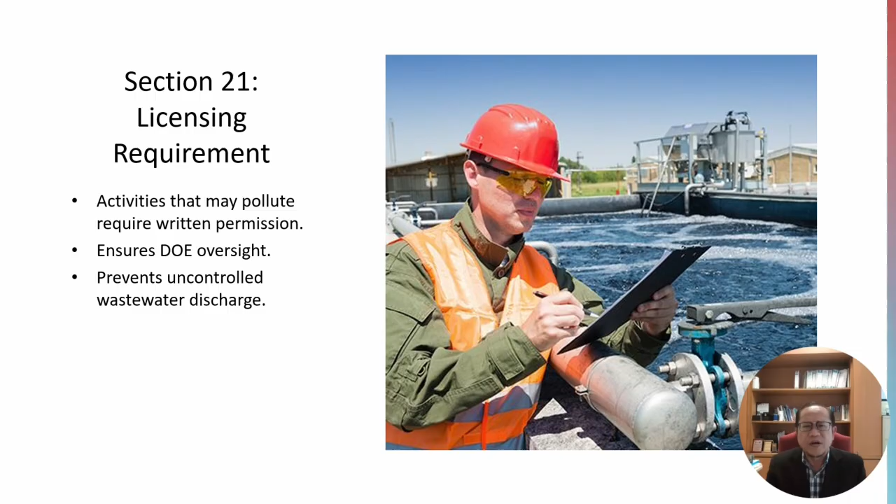Section 21 requires certain activities, especially those that may pollute, to obtain written permission or a license from the Director General. These include facilities that handle wastewater. Essentially, it prevents anyone from operating without proper oversight. And this section matters because licensing creates accountability. It allows DOE to set conditions and limits before any activity begins. It also ensures operators understand their responsibilities early on instead of waiting until a problem happens.

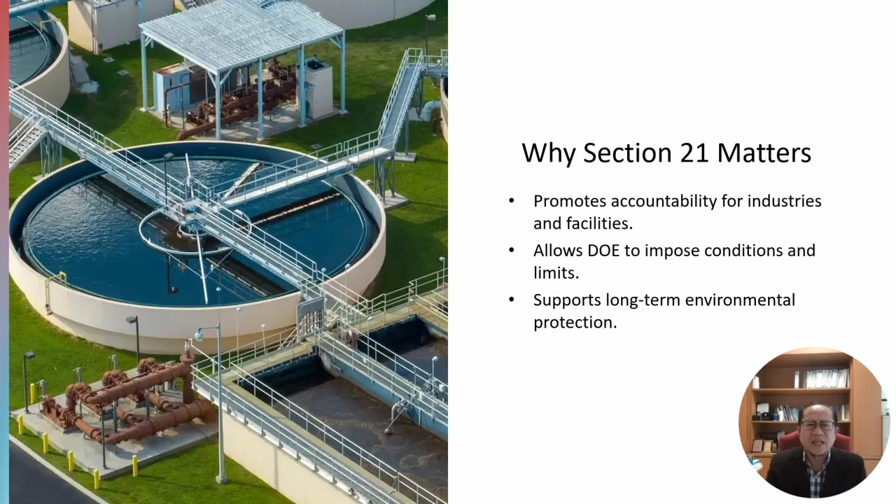Facilities that fall under this section must follow specific conditions. This may include abiding by discharge limits, performing routine monitoring, submitting sampling reports, and keeping their treatment system in good working order. These conditions help ensure pollution doesn't occur unintentionally.

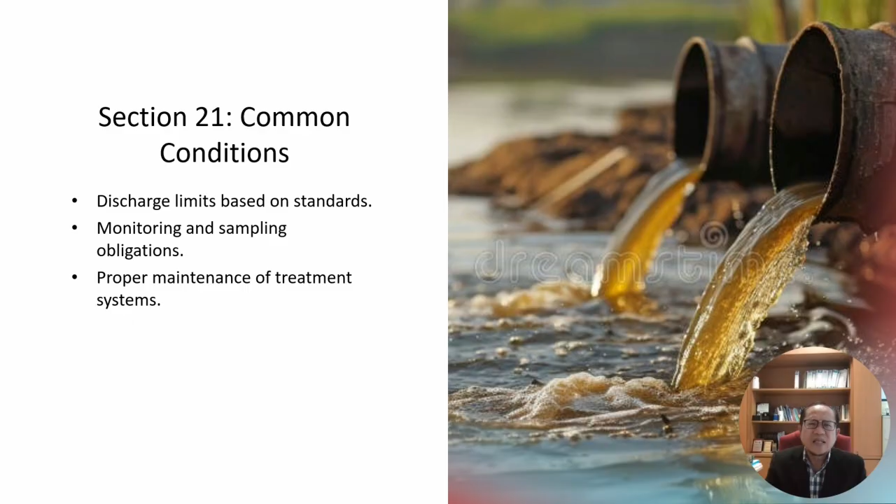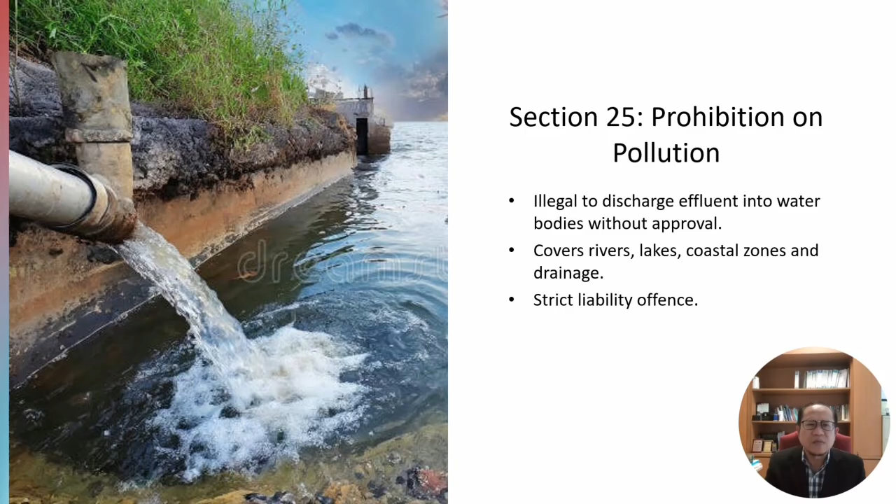Section 25 is strict. It makes it an offense to discharge any waste into inland waters without written approval. This applies to rivers, drains, lakes, and even coastal waters. Whether the discharge is intentional or due to negligence, it may still be considered an offense. The implication is simple. Facilities must treat wastewater properly before releasing. If they don't have approval or if the discharge does not meet the required standard, they are liable for enforcement actions. This protects the environment and public health.

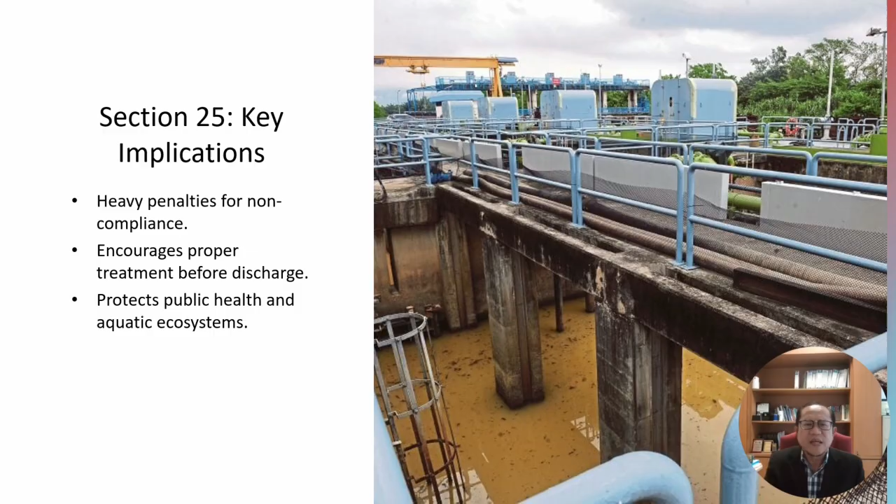Examples include releasing untreated sewage, bypassing treatment during equipment failure, or allowing overflow because a facility wasn't maintained. Even accidental releases may fall under this section. So, operators need to be proactive.

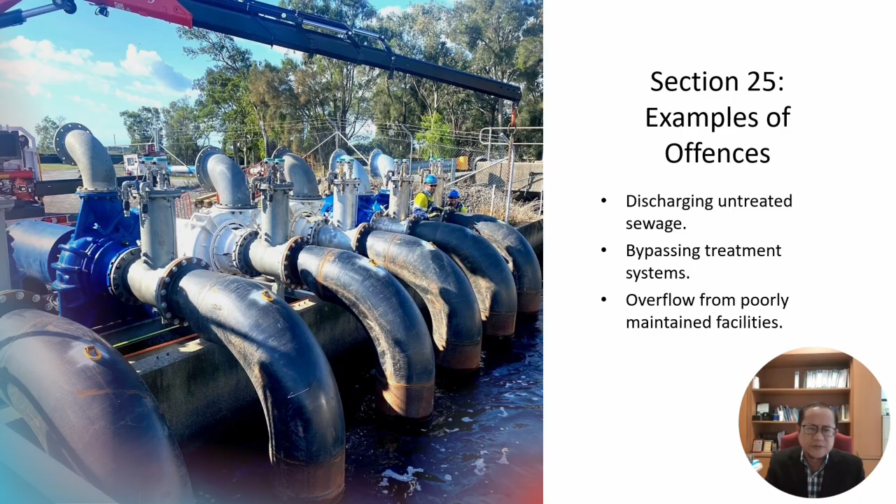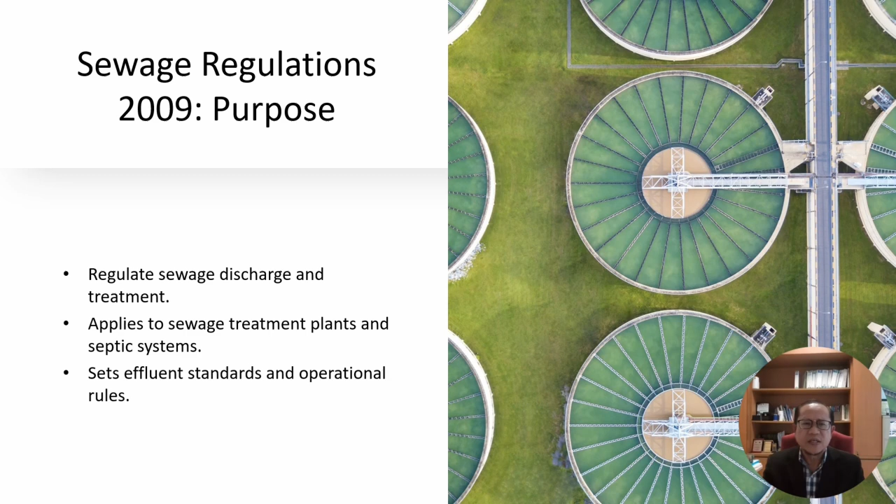These regulations provide detailed requirements for how sewage treatment systems should operate. They apply to everything from centralized treatment plants to small individual systems. Their main purpose is to ensure sewage is treated safely and consistently. The regulations outline how treatment systems should be operated and maintained. They cover performance requirements, preventive maintenance, and even reporting obligations. The idea is to make sure operators manage their systems responsibly.

These regulations set two categories of discharge standard, known as Standard A and Standard B. Standard A applies in environmentally sensitive areas, while Standard B applies elsewhere. Both specify maximum limits for BOD, COD, suspended solids, nutrients, and pathogens. Operators must conduct routine sampling and laboratory testing to verify that their effluent meets the standard. They also need to keep proper records and make them available to DOE when required. This helps track compliance over time.

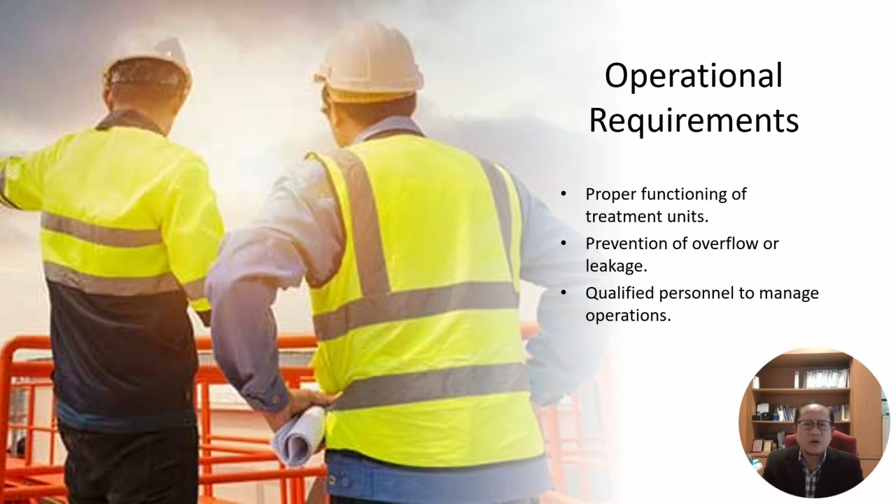Treatment systems must be maintained and operated properly. This includes ensuring the equipment is functional, preventing leaks or overflow and making sure no untreated sewage bypasses the system. Qualified staff should always oversee plant operations. If a facility fails to meet the regulations, penalties can be imposed. These may include fines, prosecutions, or even orders to halt operations until corrective measures are taken. The goal isn't to punish, but to protect the environment and ensure proper management.

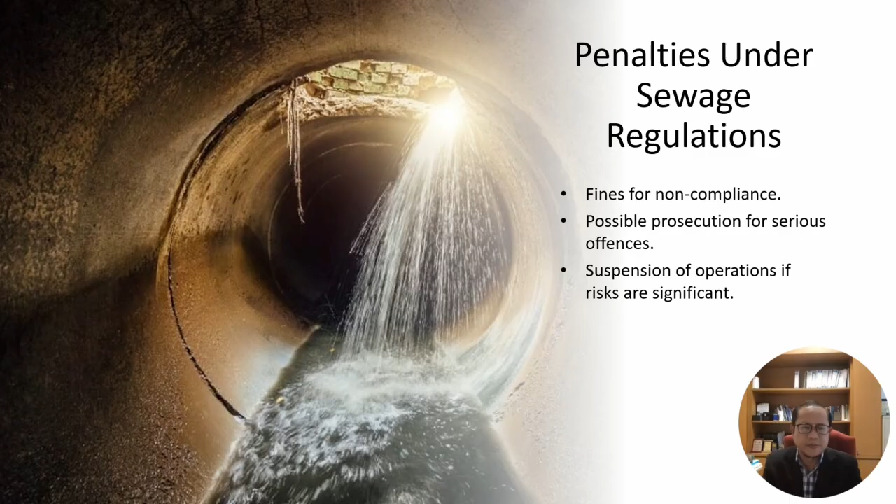Although our main focus is sewage, industrial wastewater is regulated through a separate set of regulations. These rules ensure factories treat their effluent before discharge and maintain their treatment systems properly. Understanding both helps us see the full picture. When you put all these provisions together, Section 21, 25, and 29, plus the sewage and industrial effluent regulations, you get a comprehensive framework. It covers prevention, control, monitoring, and enforcement. It is designed to ensure wastewater is managed responsibly from start to finish.

In summary, Malaysia has a strong legal framework that governs wastewater management. This law helps protect our rivers, our communities, and our environment. A good understanding of these provisions is essential for anyone working in environmental science, public health, or wastewater operations, especially environmental health professionals.